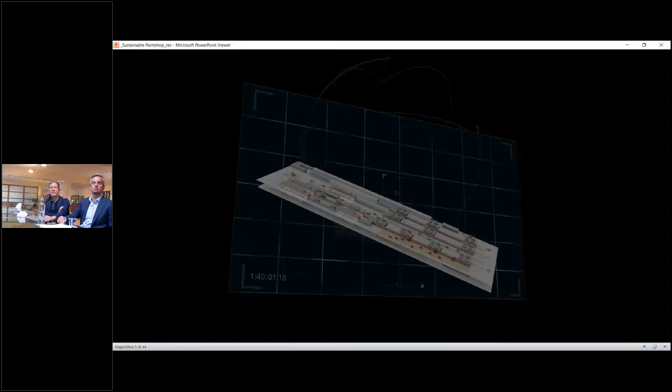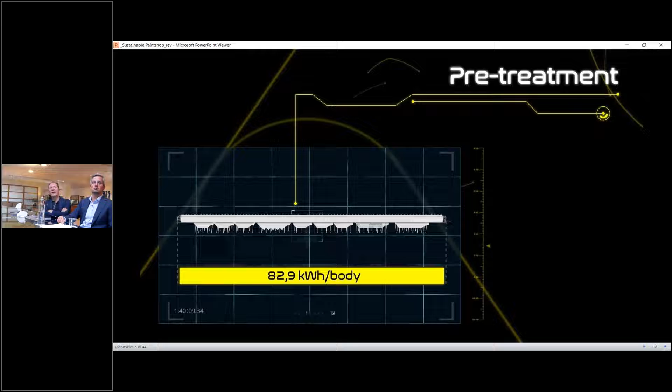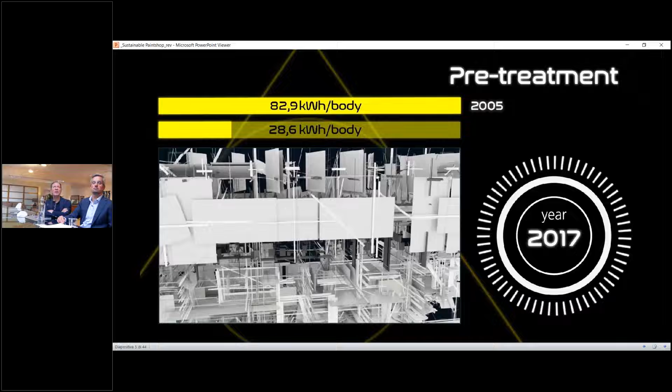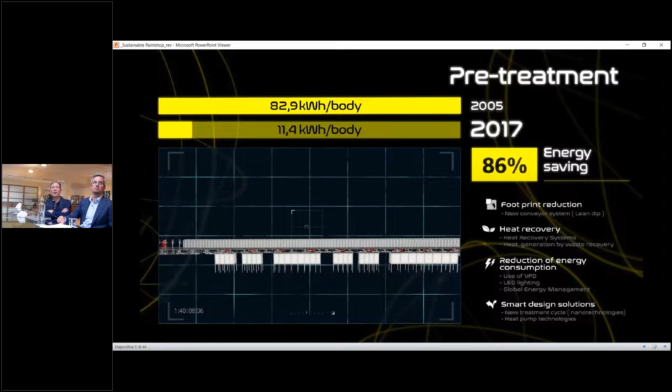Let's go ahead with the next slide, where, connected with our goal of reducing energy and CO2, we can show the different areas where we have worked. Actually, we have worked on every single step of the paint shop process, starting from pretreatment, where we have reached 86% in terms of energy saving, and moving from the pretreatment to the other process steps.

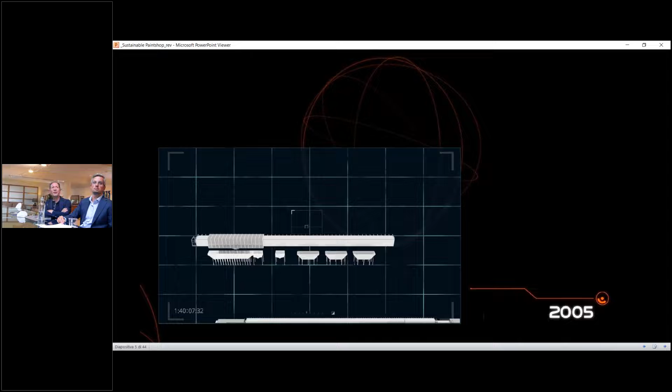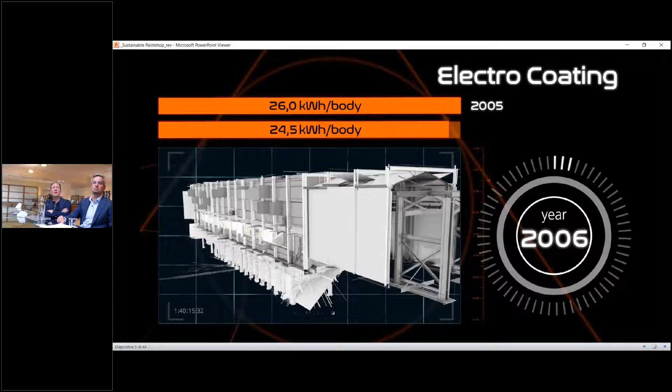Electrocoating is, of course, another very important process inside our paint shop, where a lot of development has been reached, again reducing the energy by 23% of the original value.

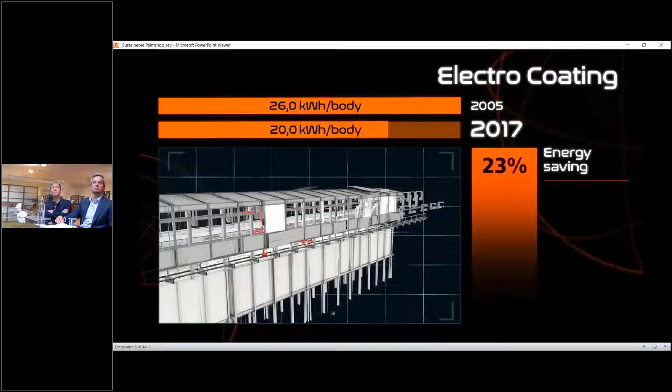So if we take the pretreatment and electrocoat as a whole, what we call the corrosion protection process, we have moved from an original consumption of 80 kilowatt-hour per body and 26 kilowatt-hour per body, respectively in the pretreatment and the electrocoating line.

Together with this energy consumption, we've had the opportunity to lower both operating cost and footprint. This also has had an impact on the overall management of our plant, of our system, and also allowed a cleaner process, meaning lower contamination of the bath due to drag out from one pretreatment or e-coat stage to the other one.

This has been realized working on the conveyor systems, for which we have developed the J-Jump family and the Lean Dip family of conveyor systems. And these have been the targets that we have achieved: 11.4 kilowatt-hour per body in the pretreatment, with a reduction of 86%, so a huge reduction, and 20 kilowatt-hour per body in the e-coat, with a relevant reduction of 23%.

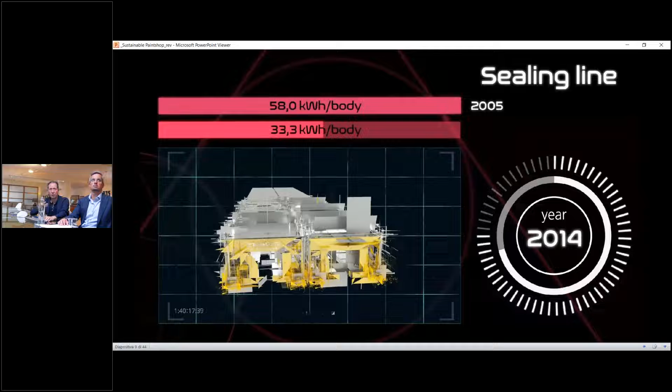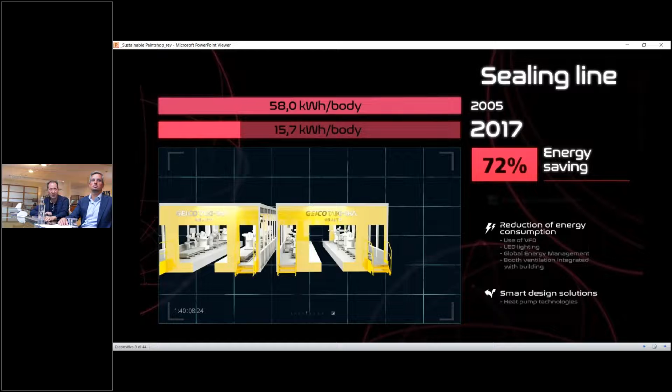Now we move to another process step, the sealing line, where the original value when we started our work was 58 kilowatt-hour per body. Through the implementation of different improvements and products, we've been able to go to 15.7 kilowatt-hour per body, meaning a 72% reduction in energy consumption. Also for this process step, different goals have been reached, for example footprint reduction.

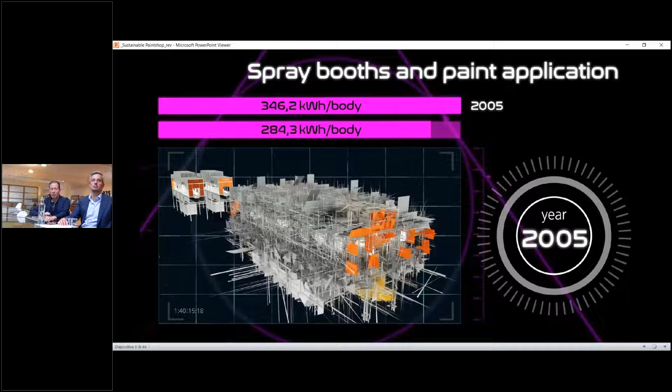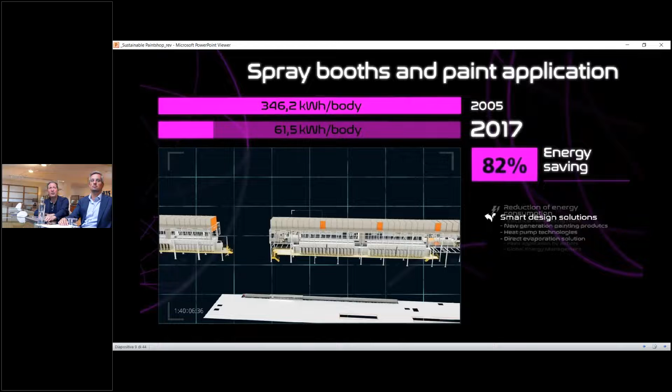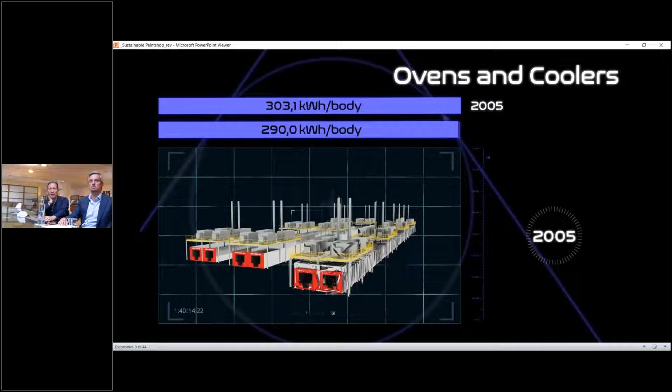The key point in our overall Energy Independence Day project has been the one dealing with the spray booths. Spray booths, when we started our analysis, were by far the process step with the highest consumption, 346 kilowatt-hour per body. So we have focused a lot of effort on reducing the energy in this process step. The second process step by importance has been ovens and coolers. We have been able to dramatically reduce the consumption in this process step by more than 50%.

If we have an overall look at these last process steps, from the sealing line up to ovens and coolers, what we have done to reach our target is to work on the ventilation, where we have included an overall concept of ventilation, taking into account not only the paint process and paint equipment itself, but also the building ventilation. By integrating the two different aspects of ventilation inside the paint shop, we've been able to reduce the energy.

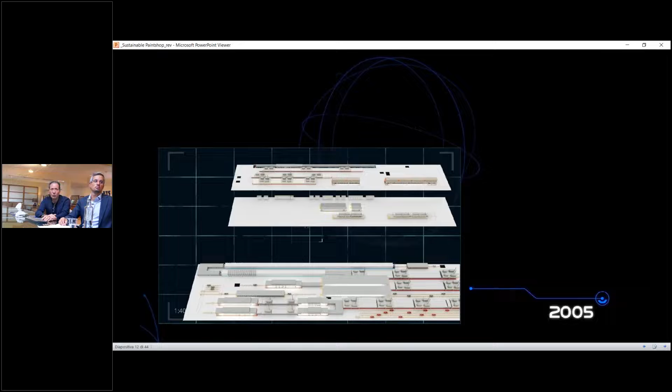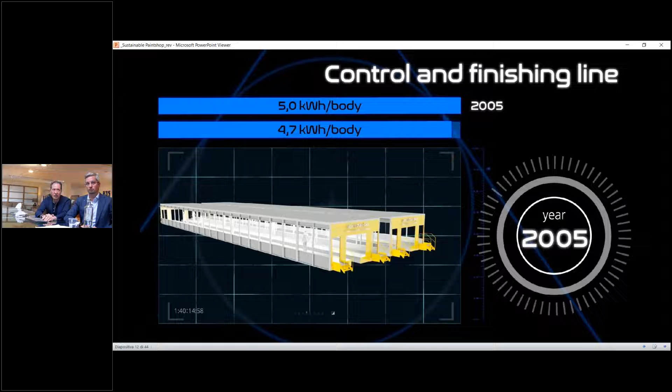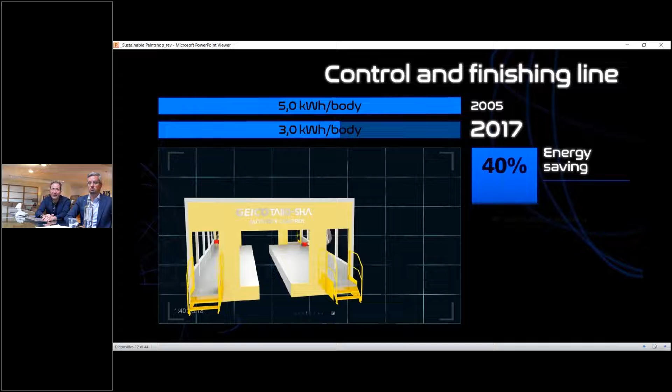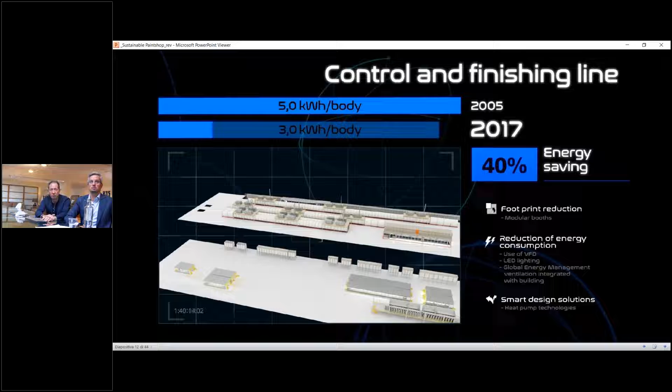Then if we move towards the end of the process inside the paint shop and talk about control and finishing, even if this is not the energy-demanding part of the process, we have also optimized the solutions, and in this field we've been able to reduce the energy by 40%, from 5 to 3 kilowatt-hour per body.

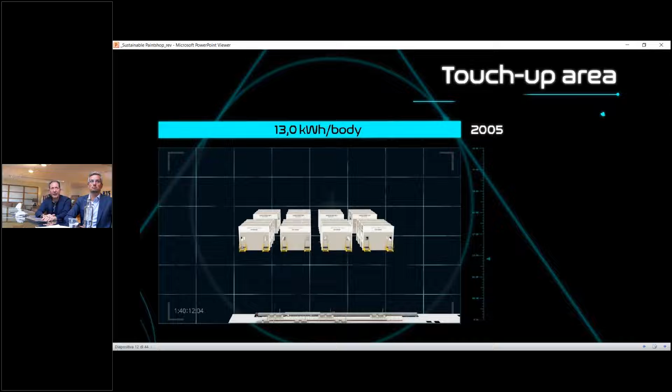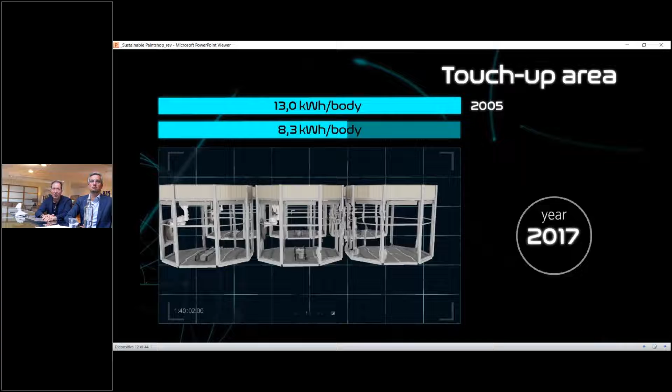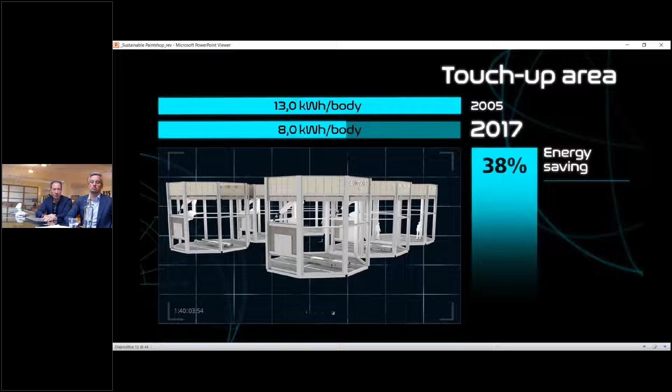Then, if we move to the touch-up area, where we have also some process steps which are similar in terms of energy consumption to the main spray booth, we've been able to reduce the energy consumption per body from 13 kilowatt hour per body to 8 kilowatt hour per body, thus achieving a 38% of energy reduction. So again, if we summarize the last process steps.

What we have introduced here is, due to the technology of filtration, overspray filtration and so on, a higher air recirculation in the spray booth. We have also introduced our AGV system, which has been fully developed in-house, moving towards a modular layout, very flexible, and using the booths only when they are really needed.

As far as Industry 4.0 items are concerned, we've also been able to introduce our GeicoTaikisha system, that is the system which is able to automatically detect the defects and to give feedback to the plant managers, to the paint shop managers, to be able to collect data information from the field in terms of quality of the coated surface and to turn such information into actual actions to be done on the different process steps in order to improve the efficiency of the paint shop.

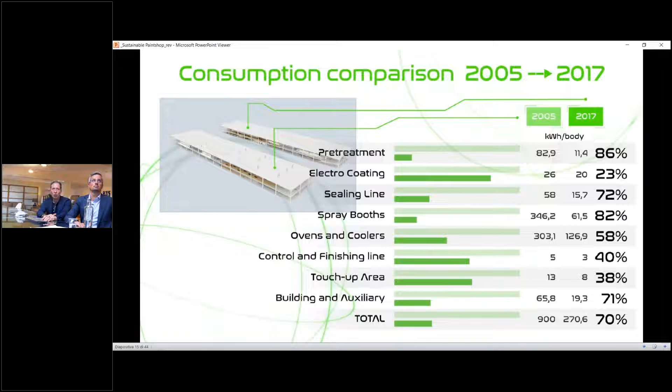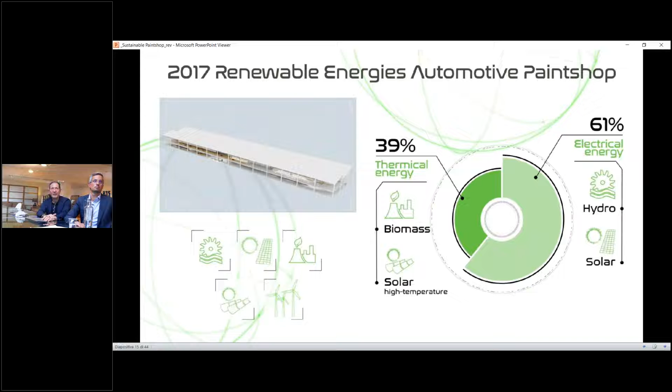In this area, our achievement has been the reduction of 38% of the energy, moving from 13 kilowatt-hour per body to 8 kilowatt-hour per body. So, at the end of the day, this is the overall summary table with the reduction that we have been able to achieve in the different fields, in order to be able then to introduce renewable energy sources and thus to start our path towards not only the Energy Independence Day, but towards the CO2 free day.

Just to summarize, the target date is 2027, and, as we have done for the Energy Independence Day, we will put all our efforts into anticipating that date when possible. The concept of the CO2 free day is to work not only on the reduction of the CO2 coming from the reduction of the energy consumption, but also not to have inside the paint shop itself, inside the processes present in the paint shop, any CO2 production. This is the additional point that we are adding to our original project.

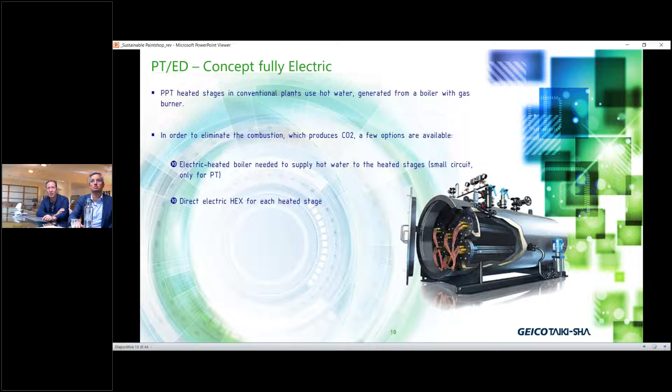So we have some options available to us to be introduced in order to eliminate the gas source, and those options can be either using an electrically heated boiler to produce the hot water, or having a direct electric heat exchanger at every single point where the process needs some energy to warm up or to keep the different process steps inside the pretreatment and e-coat at the right temperature.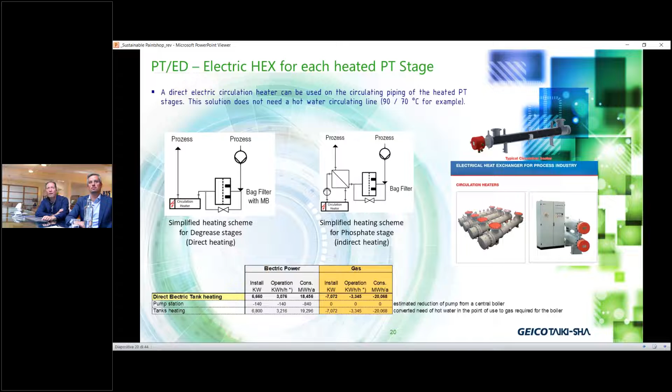Then we move again to the ovens, because ovens, of course, are huge gas users, and such fuel, of course, is one of the key root causes for the CO2 footprint value that we have today. Again, here the solution, as illustrated in the picture in the slide, is to use heater boxes which are directly fed with electric power.

We have the possibility to install different size, different capacity electric air heaters from 1 kilowatt up to 1 megawatt. And they are very simple to be installed, very clean, and of course, very easy to be maintained when we make a comparison with the equipment that is normally used nowadays.

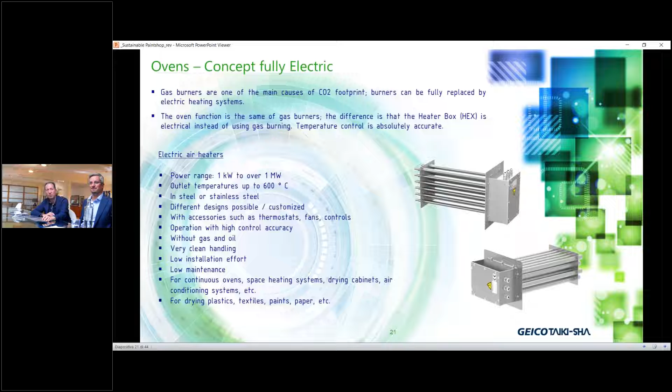We have the same type of concept for spray booth ventilation, where again we require heating stages which are commonly fitted with a heat exchanger. Then we can use hot water or a direct gas burner, but in both cases we could have some impact in terms of CO2 footprint. Of course, in case we use hot water, we can use hot water production systems which are fed with electric power, or on the other end.

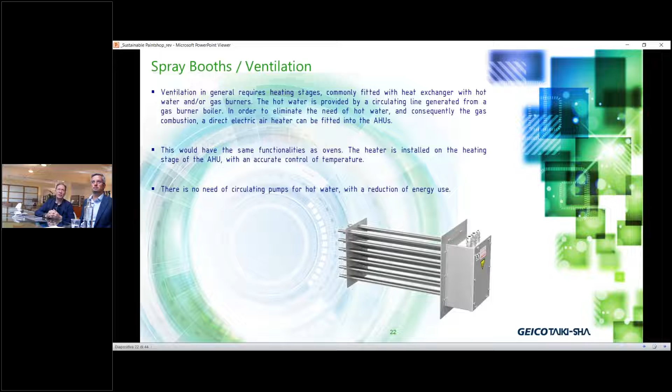So in this case, the air supply unit itself does not change, or we can implement a direct electric powered heat exchanger inside the air supply unit.

So if we want to make a wrap-up of what we have discussed and illustrated so far about the concept of the fully electric paint shop, we could have these summary tables which show that we could just work with electric power, so no gas anymore, no oil anymore, and water. Water is another key point that needs to be addressed, but already with the current solution, we are able to reuse and recirculate most of the water running inside the paint shop itself.

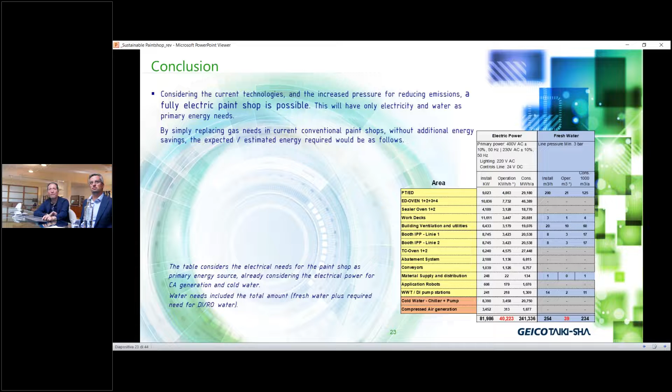Of course, all these systems, the different products that we have seen spread inside the paint shop in different areas and process steps, can be further optimized by using a heat recovery system. This heat recovery system is something that we normally discuss with our OEMs at the beginning. It increases the value of the investment by a certain amount according to the complexity and the extent of the system.

But on the other end, our OEMs can have big advantages in operational cost, thus allowing them to reduce the day by day or year by year consumption cost that they have in running the paint shop.

Of course, we have other options. We have talked about PT and ED. We can make use of a heat pump or chiller with heat recovery in order to balance the need for heat and the need for chilling units, with equipment that is able to recover a part of the energy produced to chill the water, to be reused to warm some pretreatment stages.

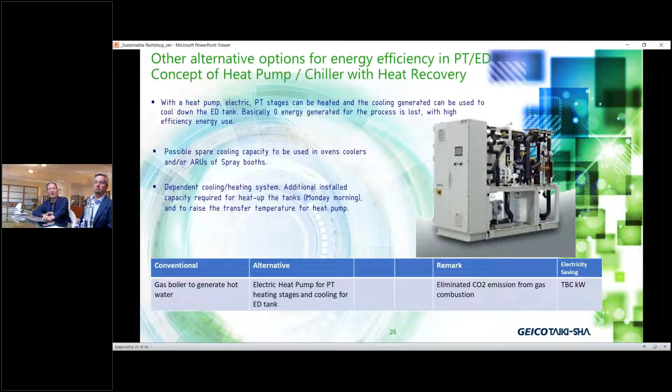In terms of further improvement, there are other concepts that can be introduced. For example, in the ovens, we can work on a skidless system in order to move the pure body inside the oven. So in that case we do not need to heat up a component that is not actually the body itself, but is just used to carry the body. So by simplifying the conveying system, we can reduce the energy and increase the efficiency in the oven.

We can implement, and we already do it, a direct evaporator system in the intermediate cooling and flash off areas.

Or we can also work on some less technological solution by simply improving the oven insulation with a different concept, by increasing the thickness of the insulation material itself, or by using new types of insulating material, which can be an advantage for the customer both in terms of energy efficiency and in terms of the overall clean concept of the oven through all its life, including the final disposal after usage.

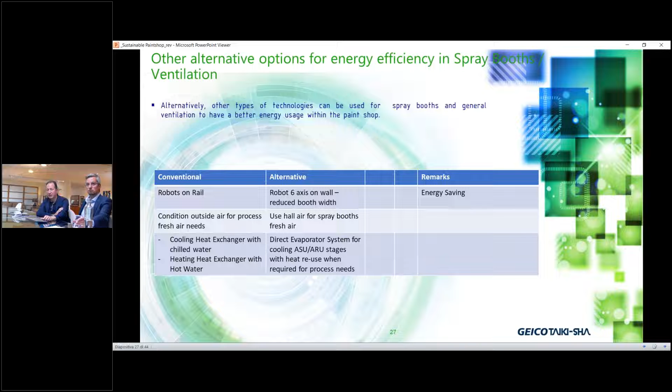And then, of course, direct evaporating systems like the one used for the ICFO. Okay, with the robot system, we can have different advantages by changing the type of robots. So you can see from this slide how we can reduce the width of the booth and consequently the quantity of air that is necessary, and together with the quantity of air, of course, the quantity of energy.

Last but not least, we have the full field of renewable energy systems, for which we have developed concepts in order to use solar energy in different ways, by using both solar thermal modules, or let me say the direct transformation of solar energy into electric power.

As for the paint equipment, the paint shop process equipment itself, of course they need a box to stay in. It is very important how we design the box itself, so the building. And for this reason, we strongly believe in and work on an integrated design of the building and of the process equipment itself. Because by approaching in this integrated way the design of the building and of the process equipment together, we can have a lot of opportunities to reduce energy.

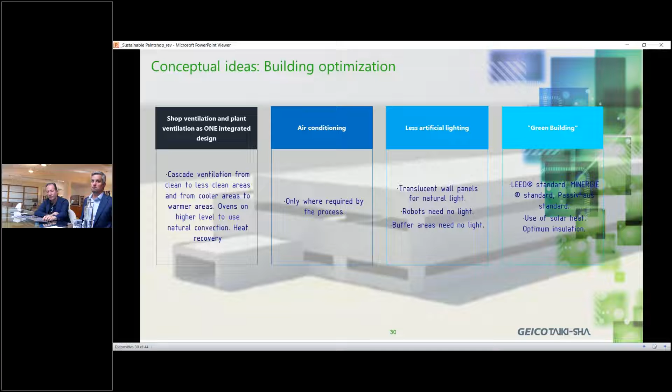So, the next step is what we call a circular approach to the process inside the paint shop. This means that we need to take care also of the CO2 coming from all the activities around the paint shop process. There are the filter disposals, the scrubbers, so any material that is used inside the paint shop and cannot today be recirculated or reused in some way. This is a key point where we need to focus in order to lower the CO2 impact again and to move with a bigger step towards the fully sustainable paint shop.

Last but not least, there are some alternative energies that are now available with better comfort on the market, like for example green hydrogen, and this is also one of the energy sources we are looking at in order to see which kind of advantage we can have by introducing this kind of energy.